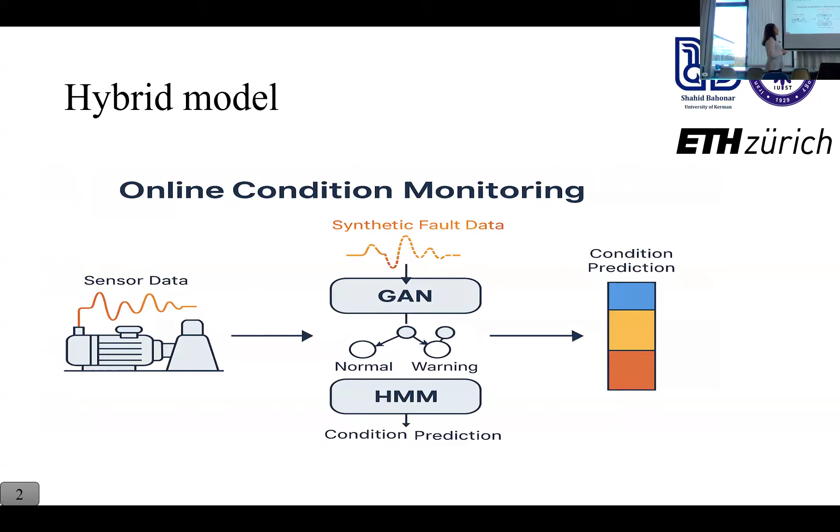So first we have a hydraulic system. This is the system. This is a benchmark. I use the data from a hydraulic system, a hydraulic test rig, and the sensor data in the system was, for example, temperature, pressure, flow, and other sensors. And we wanted to use predictive maintenance models for prediction of the condition of this hydraulic system. And then after this system, we go to rail systems.

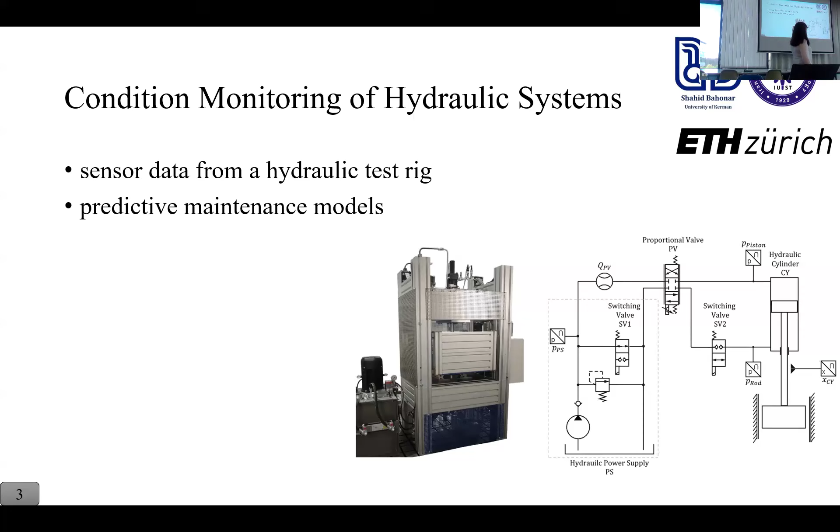So this is a hydraulic system. We have hydraulic power supplies, and by this power supply, we have a fluid, for example, oil, that comes through the hydraulic cylinder and creates movements. So we have, for example, switching valves, SV1 and SV2, and proportional valves for making the flow a proportional value. And then we have a cylinder for movement up and down.

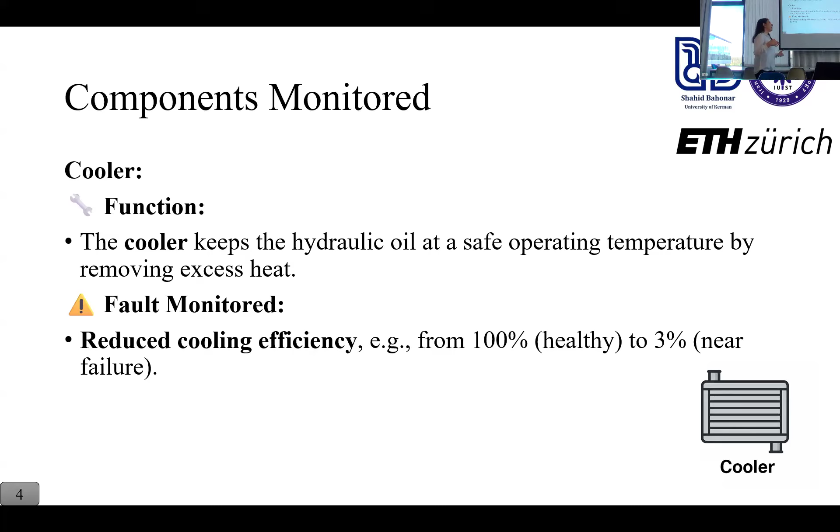The components in the system that we wanted to monitor: the first component is the cooler. The cooler keeps the temperature in a safe operating range by removing excess heat, and the fault in this component could be reduced cooling efficiency from 100% to, for example, 3%. That is near failure.

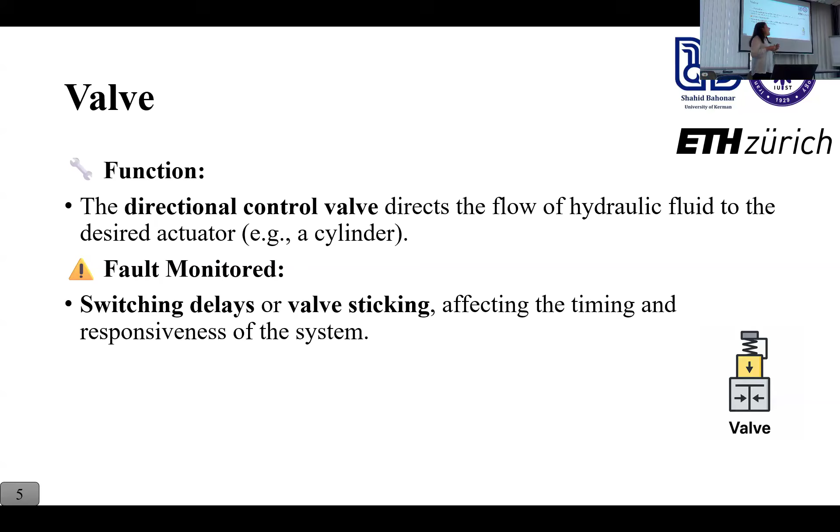The other component is the valve component. The valve controls the flow into the desired actuators, and the fault in this component could be switching delays. For example, if the valve opens with delays or closes with delays, or if we have valve sticking, this could be a fault in this component.

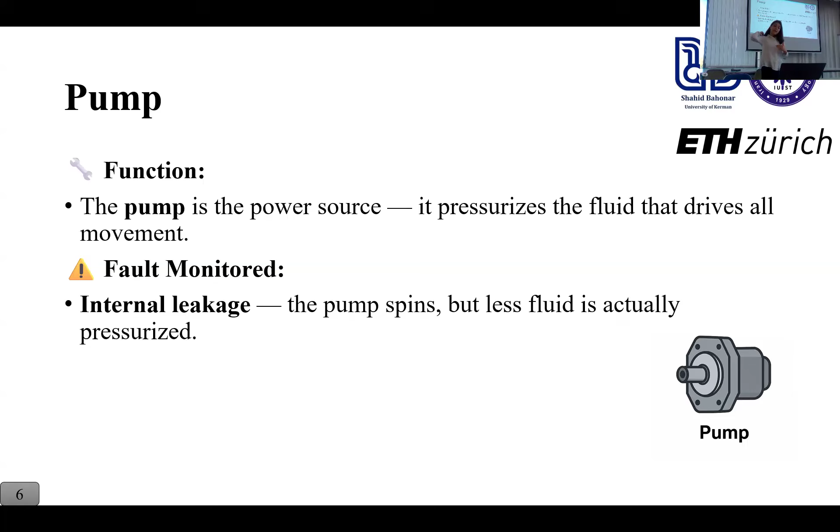Another component is the pump, that is the power source, and it pressurizes the fluid and drives our movements. The fault in this component could be internal leakage in the pump. So we have less fluid; this is the kind of fault in the pump. And another component is the accumulator that stores hydraulic energy under pressure. And the fault in this component can be pressure loss. For example, less energy is stored, and the system becomes unstable under sudden loads.

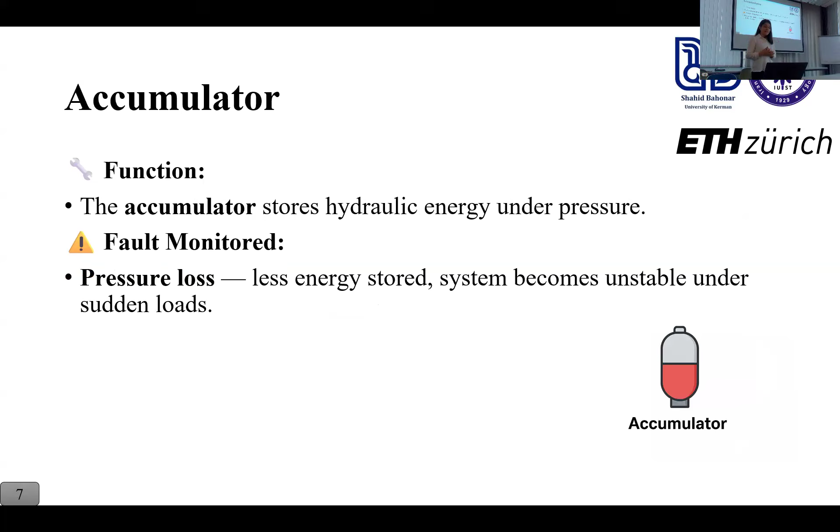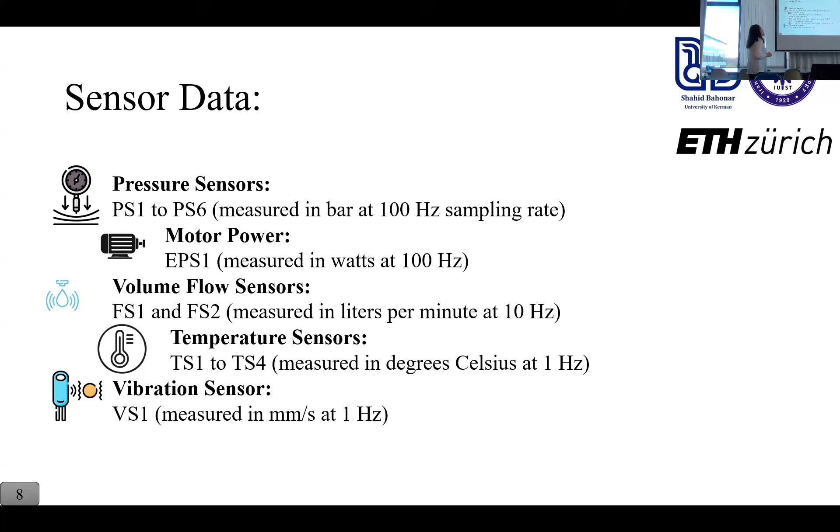And the sensors in this system are pressure sensors. We have 6 pressure sensors that measure in bar at 100 hertz sampling rate. The motor power sensor measured in watts at 100 hertz. The volume flow sensors, FS1 and FS2, two sensors measured in liters per minute at 10 hertz, and four temperature sensors in degrees Celsius at 1 hertz, and one vibration sensor.

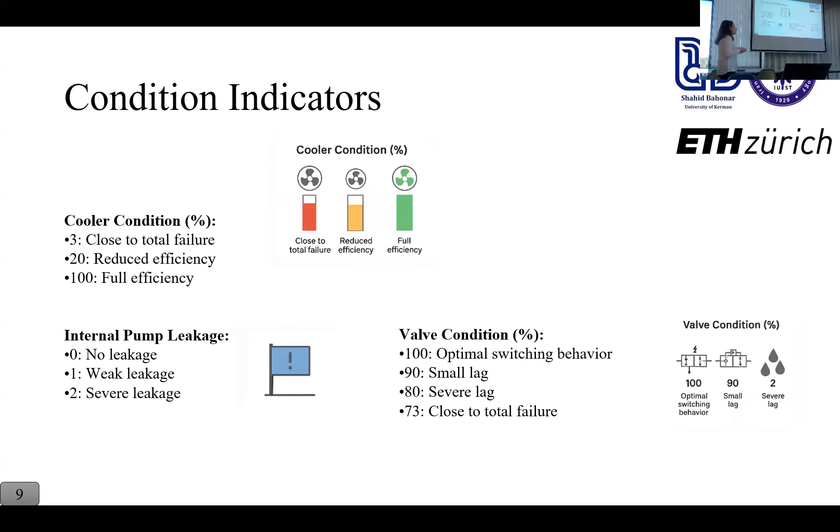Another component is the pump, where we have internal pump leakage. For the state no leakage, we have 0. For the state weak leakage, we have 1. And for the state severe leakage, we have 2. And for valve condition, we have 4 conditions: optimal switching behavior, small lag, severe lag, and close to total failure.

And also, another condition is for the hydraulic accumulator, with 4 conditions: optimal pressure, slightly reduced pressure, severely reduced pressure, and close to total failure for the accumulator.

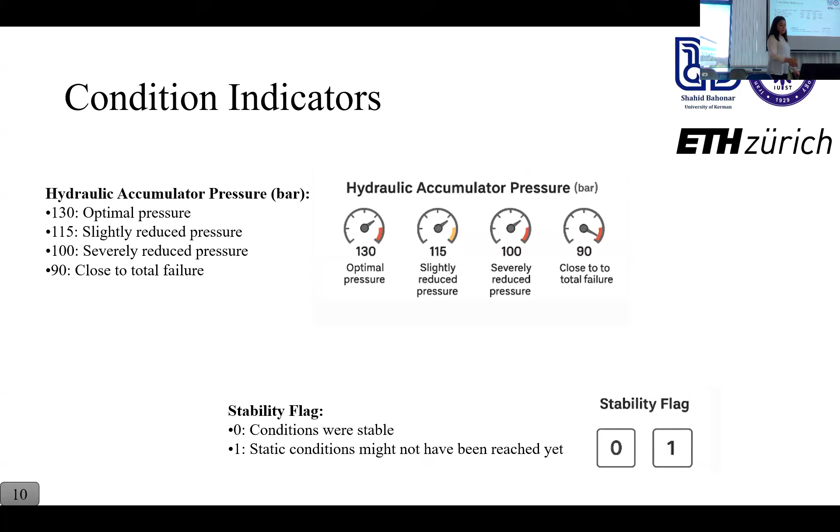And there is another overall indicator for the condition of the system, a stability flag. We have 0 for a stable condition, and we have 1 for a static condition; it might have been reached here, might not have been reached.

And in the problem context, we have 4 problems. The first one is rare failure data. In industrial systems, we mostly have a challenge with rare failure data, because usually the systems are working in normal operations. So we have a scarce number of labeled failure examples.

And another thing is uncertainty. For example, in hydraulic systems, we could have sensor noise, we could have environmental fluctuations, but the true state of the system, for example, healthy or faulty, is hidden. We couldn't directly observe the state of the system.

So, to address the first challenge, that is the rare number of defect data or insufficient data, I propose the generative adversarial network, or GAN for short. GAN consists of 2 neural networks. The first one is the generator, and the second one is the discriminator.

The generator starts with the latent space using input noise, and generates data that we name fake data. Then the fake data goes as input to the discriminator, and another input for the discriminator is the real data. So we have real and fake data as input of the discriminator neural network, and then the discriminator labels the data as real or fake.

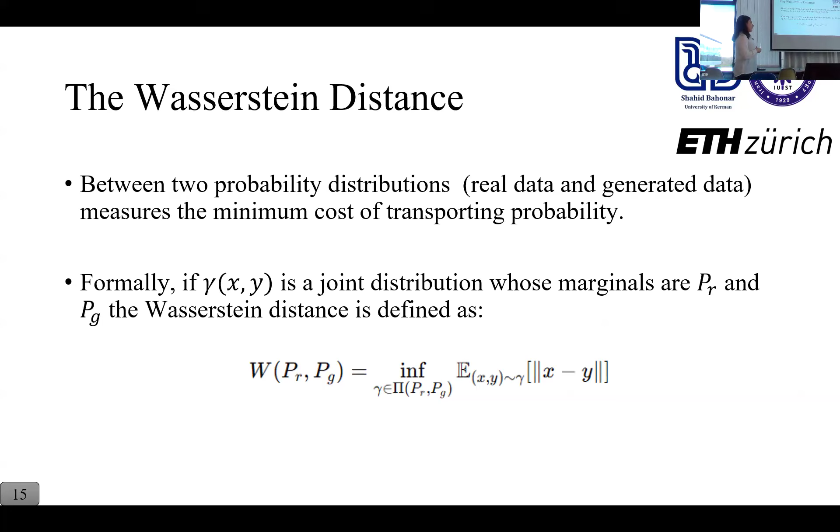And the loss function of WGAN tries to score the generated data between real and fake. We have D for the critic that scores the real samples, and G for data generated from noise. The critic aims to maximize this difference, giving a high value to the real data and a low value to the fake or generated data.

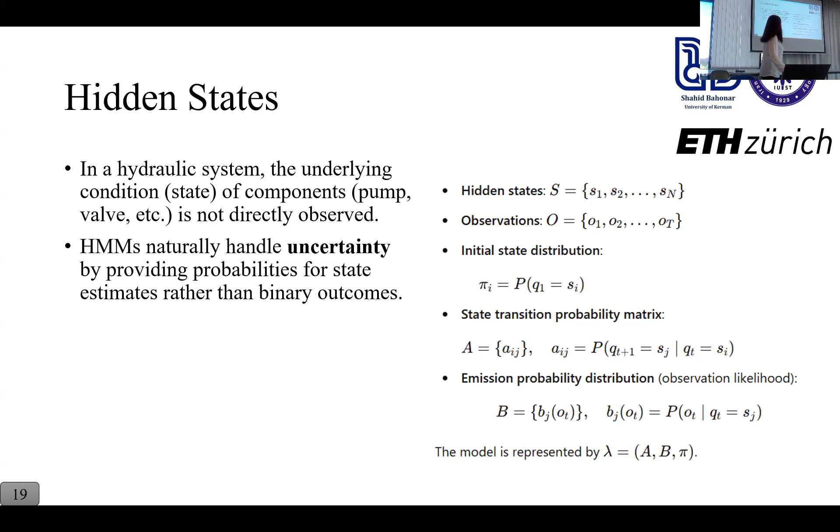For learning the parameters of the hidden Markov model, I use the Baum-Welch algorithm, which is an expectation maximization algorithm. First we have initial probabilities, and then we re-estimate transition probabilities and re-estimate emission probabilities. And here we have the probability of each state, and the probability of transition between each state.

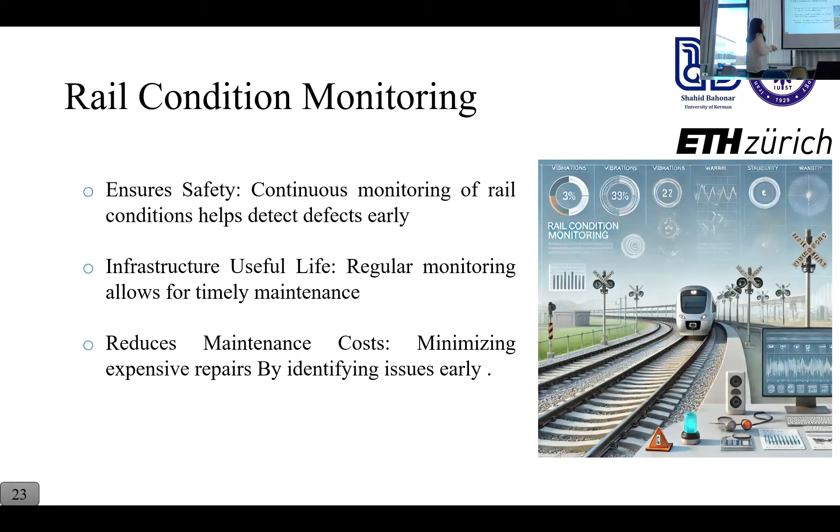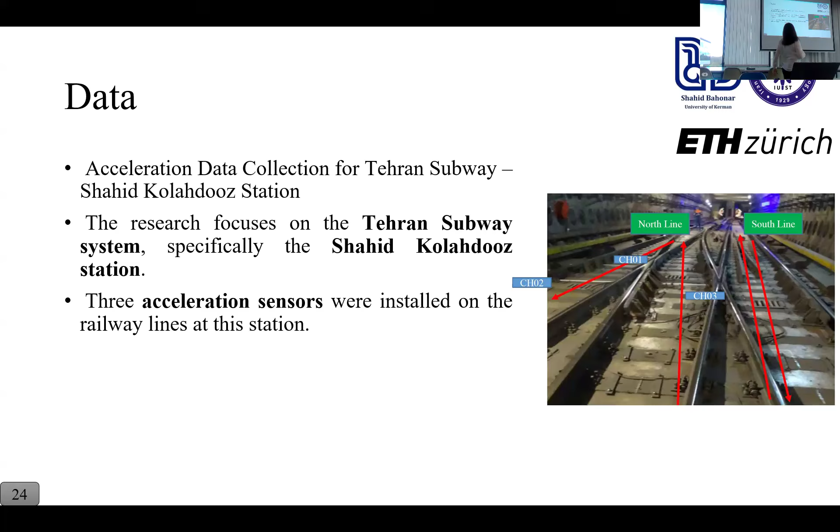After that, I go through the rail data set, rail condition monitoring. For rail, we need continuous monitoring for infrastructure remaining useful life and to reduce the maintenance cost. The data was acceleration data collected from the Tehran subway at Shahid Kolahdooz station. The acceleration sensors were installed on the line of the stations. We have 3 acceleration sensors here. Data collection was during 9 months, but now the data collection stopped, and the acceleration collection was for 18 hours each day. We have 7 wagons, and also we have 28 wheels.

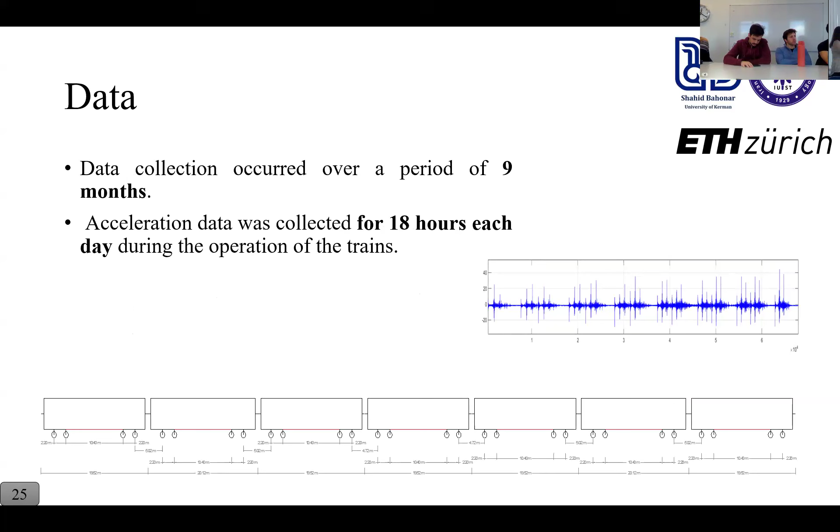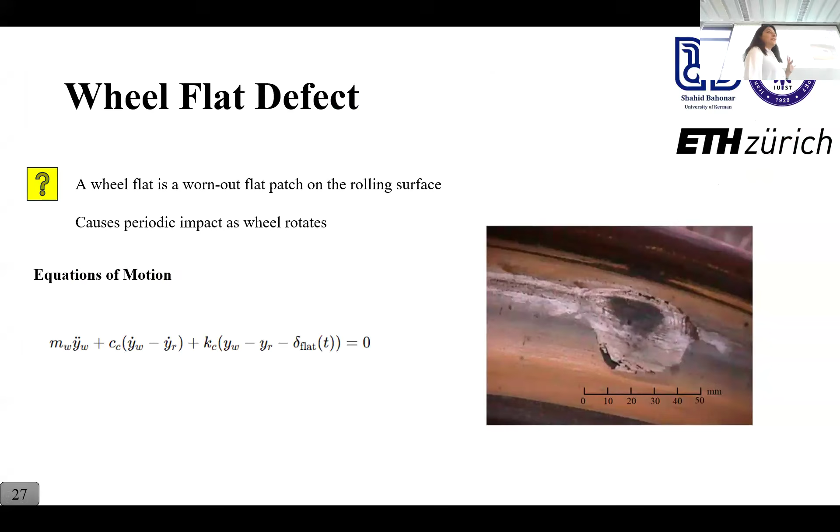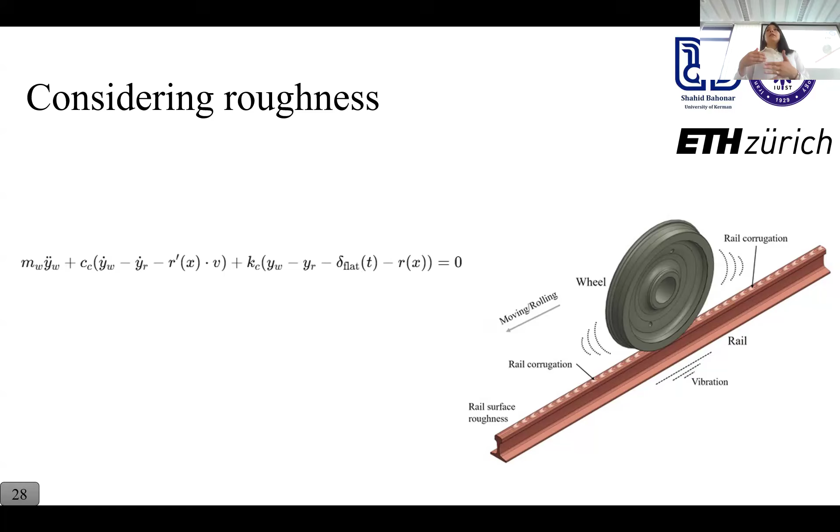So when each train passes, first I tried to use this equation of motion for the flat modeling, and I add the flat model here in this equation of motion. The result wasn't so good, so I didn't bring it here. Then I tried to consider roughness in the model, and I just started modeling roughness, so I don't have the result for now. I try to consider roughness and model the defects, and after the wheel flat defect, I want to try other defect modeling and collect the defect data. And after that, I can use the GAN and hidden Markov model for this data set.

The next step, I haven't worked on it, but it is in my mind, is using a physics-informed deep hidden Markov model for when we don't have complete defect data. As I saw, there is a deep Markov model for now. But if we could use physics constraints, for example, for the hydraulic system pressure dynamics, valve switching delay, or pump laws, and combine them with deep neural networks to learn the emission function or generate latent features from sensor data, then we could have weak supervision or partial labels, to generalize even without complete failure data.

And this is how we can use a deep neural network and physics equations, combined with a hidden Markov model, to reduce overfitting to noise and combine physical truth with data-driven learning. And we can handle missing or rare fault data.